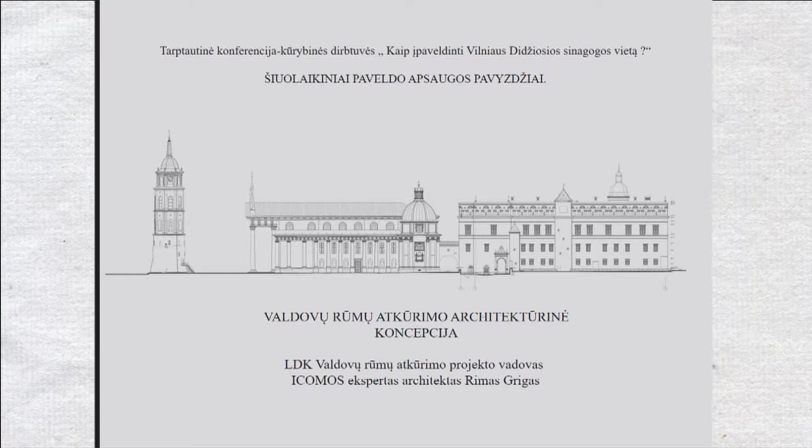Since 1994 I had the honor of leading the Palace of the Grand Dukes project, and since 2004 I've been given the responsibility and honor of preparing this project, which is so important for Lithuania.

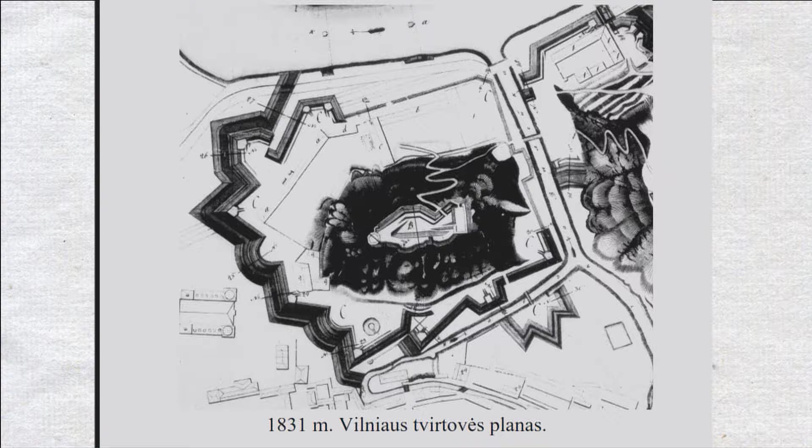Some history of reconstruction. In 1983, a reconstruction project was proposed in order to convert it into a national art gallery.

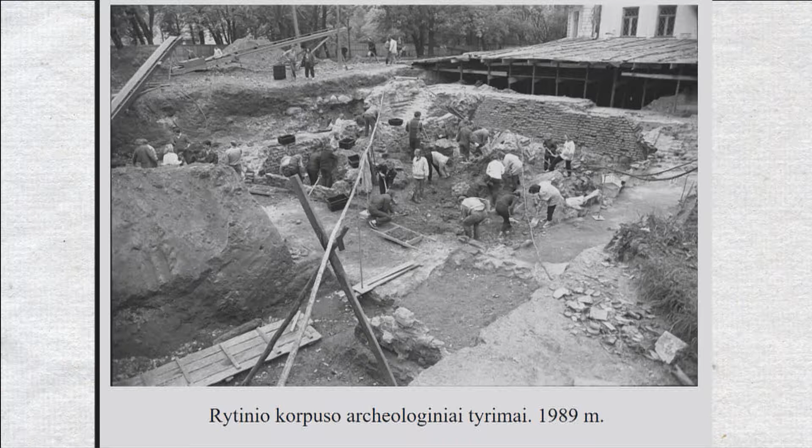In 1988, when the idea of reconstruction of the palace emerged, research was started in order to accumulate material for the reconstruction of the palace.

The remains of the underground parts of the building were excavated, and a very large educational effort was made. It was called Vilnius Pompeii, and it was very impressive to the community and residents of Vilnius.

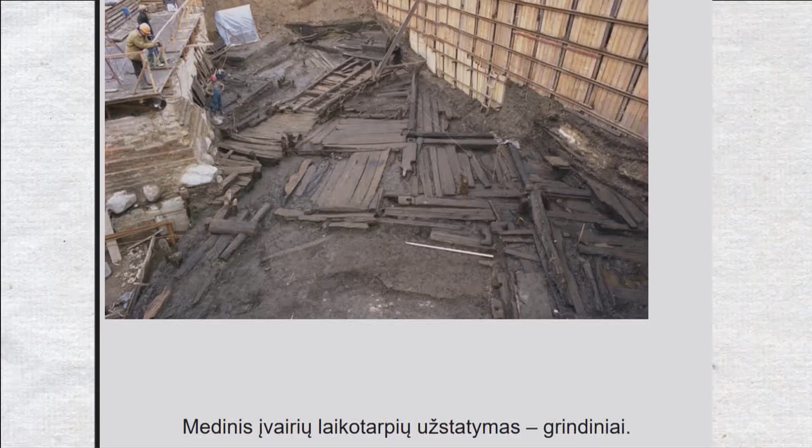It became a part of life in Vilnius, and then archaeological excavation became more intensive, continuing over the next 20 years, with more than 300,000 various artifacts accumulated.

The whole collection belongs to groups of architectural artifacts, ceramic and metal pieces. Then we created retrospectives of the construction of the whole palace.

Here, in red color, you can see the pre-Gothic remains of the castle that are outside the perimeter. The black color represents the Gothic remains, and the Renaissance part is shown in white.

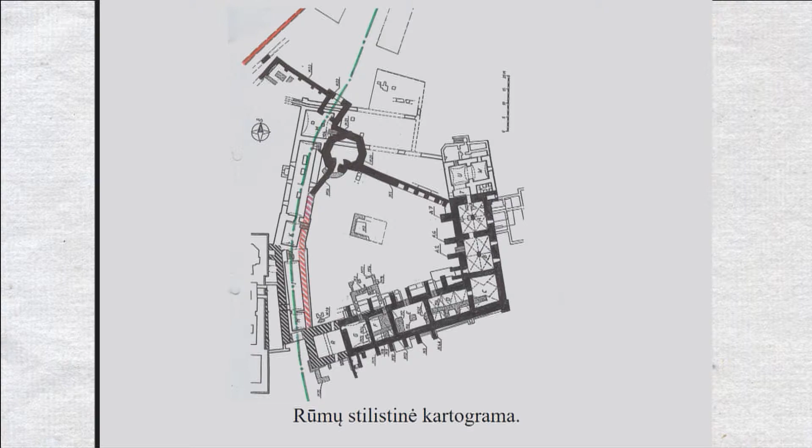We also collected historical data and made an inventory of all the finds excavated here, which helped us in the progress of the project.

Of course, there were difficulties in terms of the research made during the process, and even today we don't have all the artifacts fully inventoried and clearly understood.

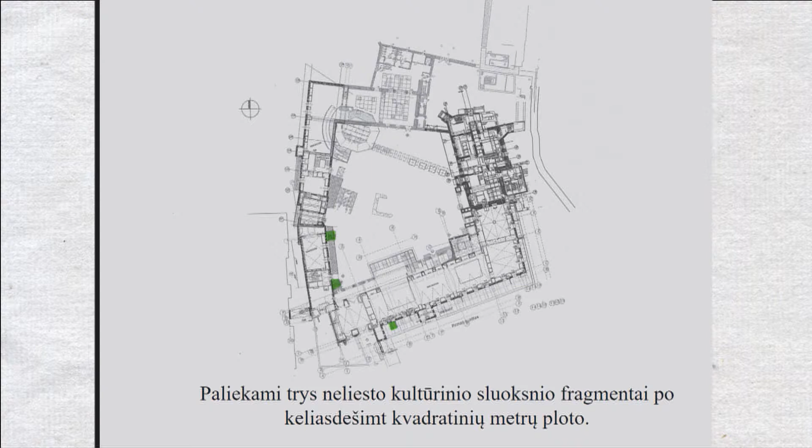Here you can see the scheme where some excavated artifacts were left in place for future generations. Not all of it was investigated and excavated.

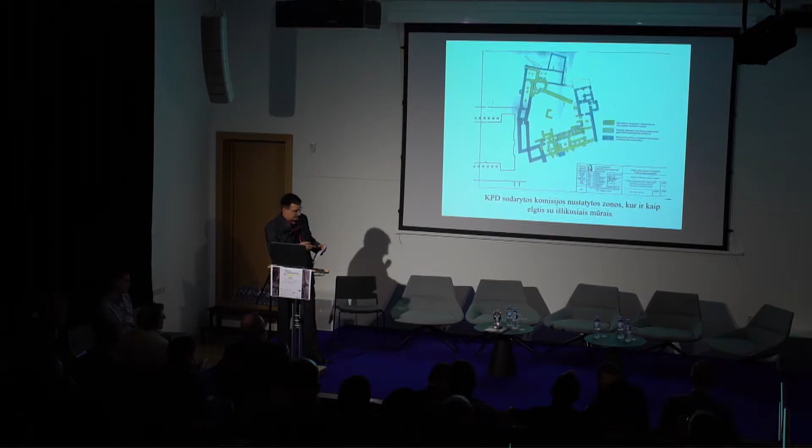I will come back to this and show this plan now. At that time, we also came to understand that we needed to make the exposition and display of these remains, covering them properly.

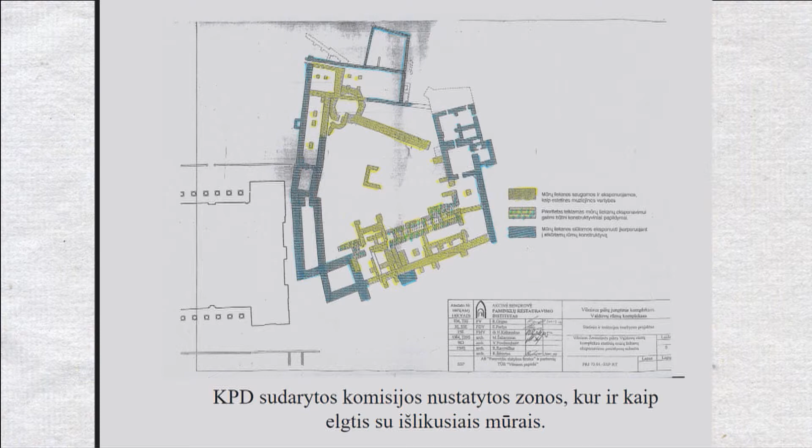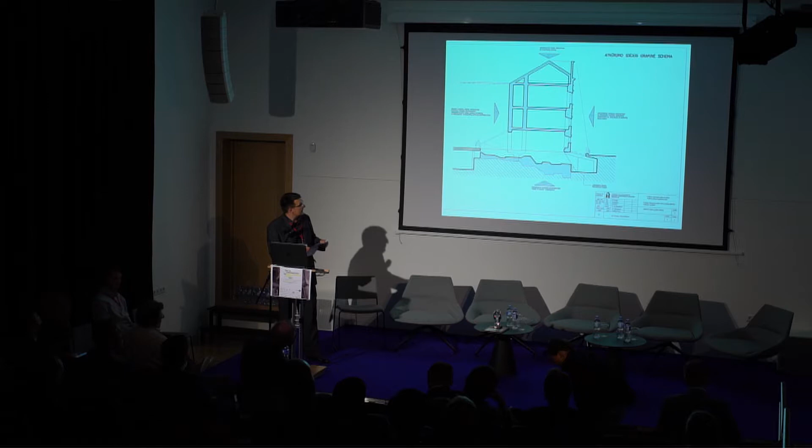We can see the zones here where we wanted to cover it for further display. My team presented the concept, and it won the tender, so we proceeded with the project.

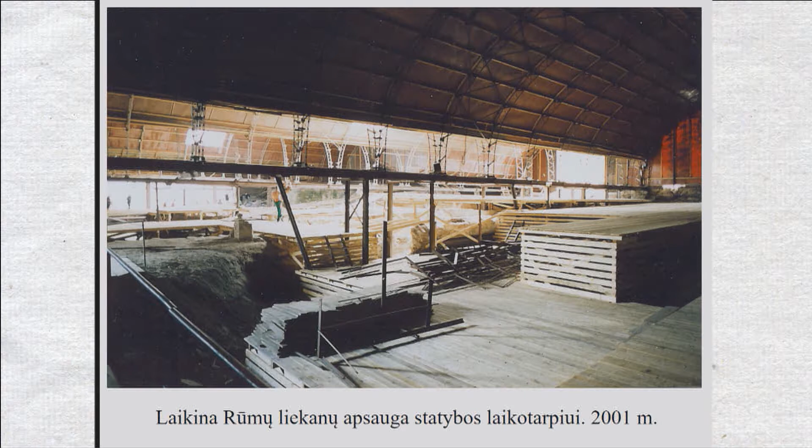At that time, in 2001, we started the removal of the hangars. The remains underground were protected by a certain cover in order to protect them from destruction.

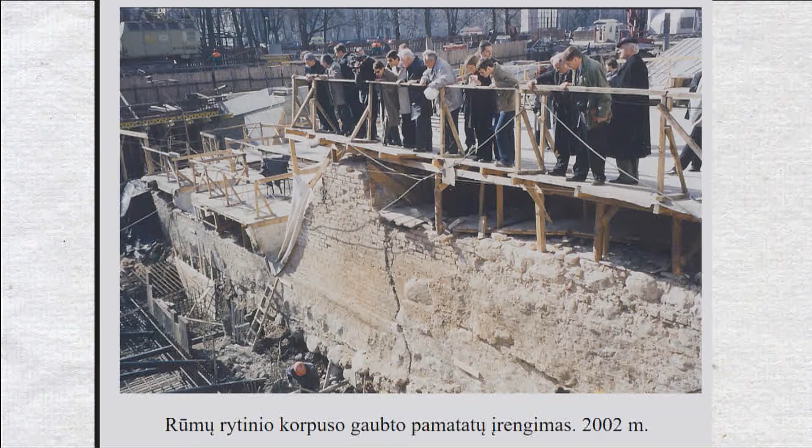You can see the cranes that started the removal of the hangars, and the eastern part was started to be reconstructed. An interesting fact: at the beginning of construction, people were coming here to see from special lookout points. And here you can see then-Prime Minister Algirdas Brazauskas, who was the curator of the construction, and he was great help for us in moral terms and provided great support.

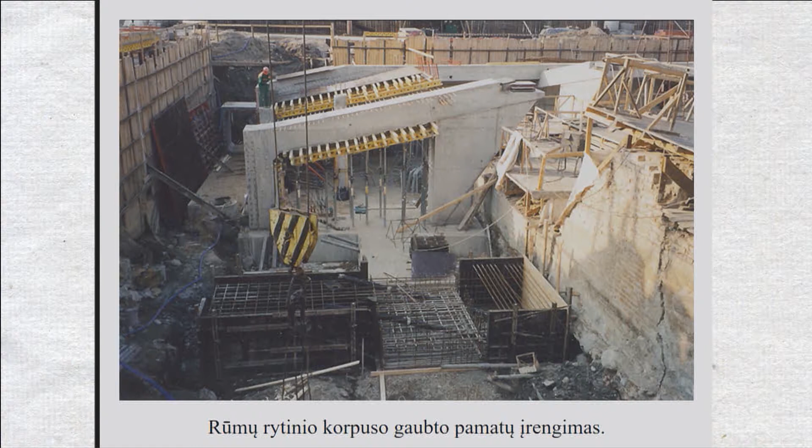This is how we started the reconstruction, the whole idea, and protected the remains of this palace. And this is an interesting plan, a blueprint of 1787, where we can see the reconstructed cathedral, the constructed cathedral, which was done by architect Stuoka-Gucevičius.

The opponents who were against the recreation of the palace said that these buildings never stood side by side, because when the palace was there, there was no classical cathedral, but when the classical cathedral came into being, the palace was destroyed. But when we found this plan, all these questions disappeared and were not an obstacle for further work.

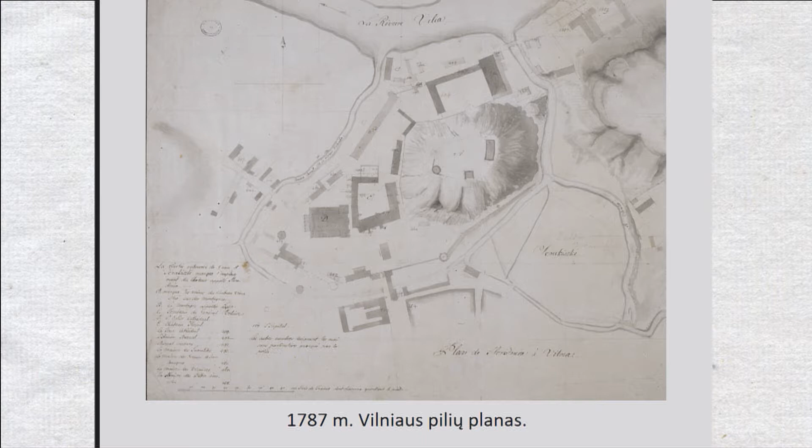On the basis of the main rules and concepts of heritage, and on the experience of neighboring countries in this respect, and in sight of the exclusivity of the object, we had 7 principles that we had to follow. The first one was the recreation of the palace as a lost chain in the whole complex of this territory.

By size, the palace is very similar to the reconstructed King's Palace in Warsaw, or the palace in Krakow. So basically, the question was why it's twice smaller in size than in Krakow and Warsaw.

Historians actually found out that a part of the buildings have not remained here, and when we look at St. Barbara's Church, we can see that all these buildings were in one system. You could go through the corridor from St. Barbara's Church to St. Casimir's Chapel. So we were not able to create these connections—maybe it's for future generations again.

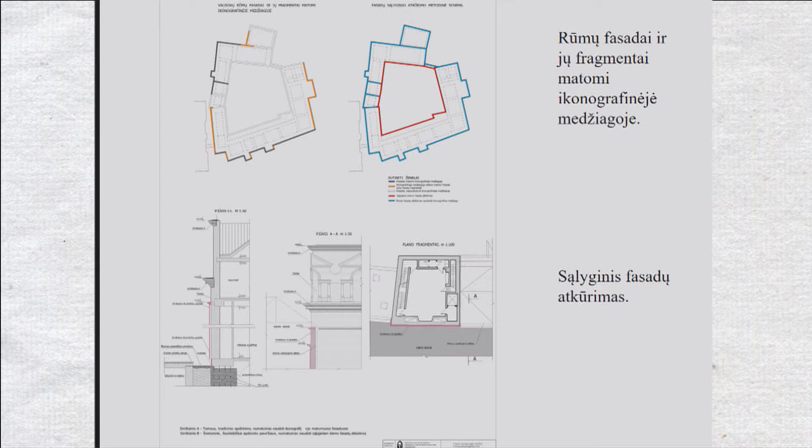Maybe you cannot see it clearly here. However, we wanted the inner courtyard facades made from stone, but if you look at them on a sunny day, you can see that the inside facades are more or less smooth, and you can clearly see which facades follow the iconographic material and which ones are interpreted.

Here we used another method, because we had really a lot of stone artifacts, and we made a number of tours around Europe to neighboring countries and took on their experience of the method to be applied. So you can see the fragment of it—all the parts made in stone are based on the stone artifacts, and this stone is taken here from Gotland island, from the original sources. We managed to do that in some curious way.

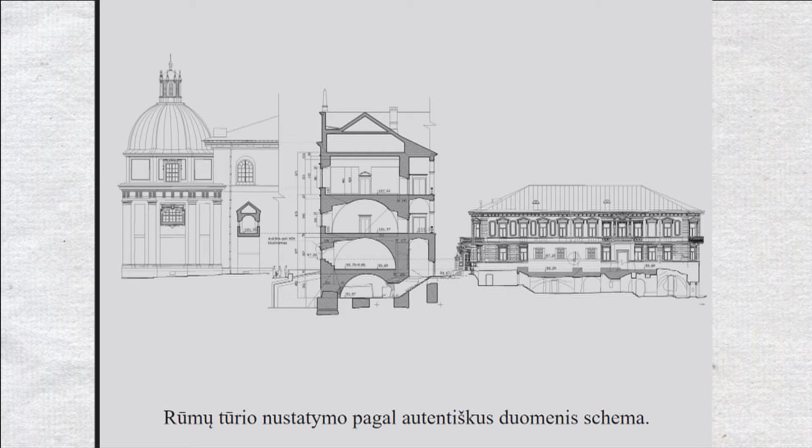The walls and the arches have their own diameter, and we put it together, and we have this type of structure. This is the constructive decision and solution—the idea is that when you go to the basement, you can really see the height of the facade.

Well, originally you can go here and see for yourself.

Actually, the only authentic part of the building is St. Kazimierz Chapel, because the Archcathedral was turned into classical style. The chapel was built here in 1610 as the main chapel for the king, which is why the architecture matched the king's palace. An interesting point is that the chapel was matched to the palace, then the palace vanished, and then the cathedral was reconstructed, and we built the palace again. That was an interesting point in history.

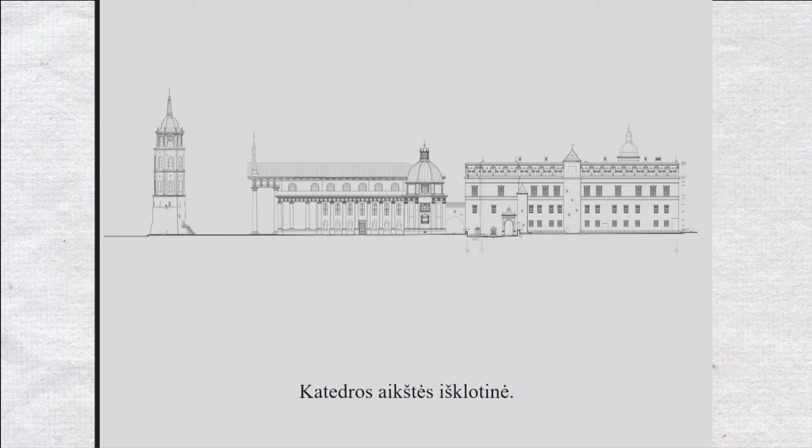Number 3: the recreation of the facade without iconographic material was based on other original remains and also the known iconographic material found in similar buildings elsewhere.

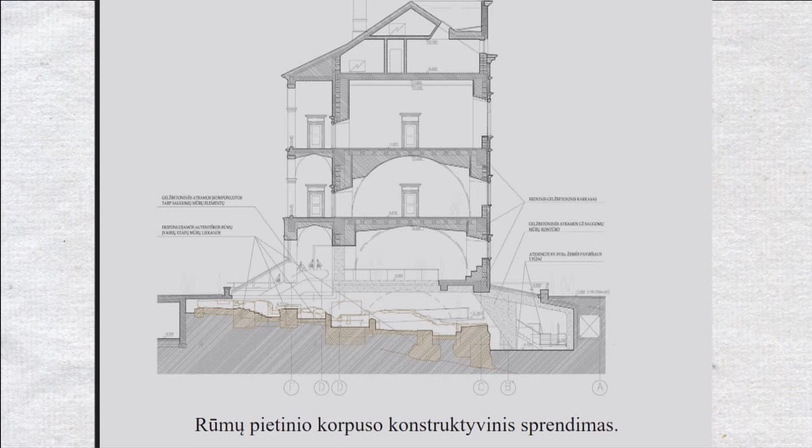With a little time left, I can tell you shortly, we can see that all the building nearly floats in the air, so we had to make very light construction solutions. Basically, some of the walls are empty, just for construction purposes, since we needed to save a lot of weight.

Now the recreation of the facilities inside was similar to the original facilities, and the halls of the palace on different floors. I can shortly say we were thinking a lot about that.

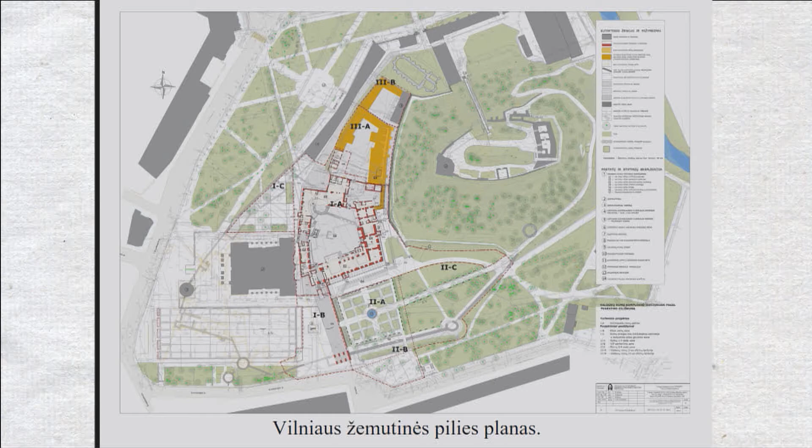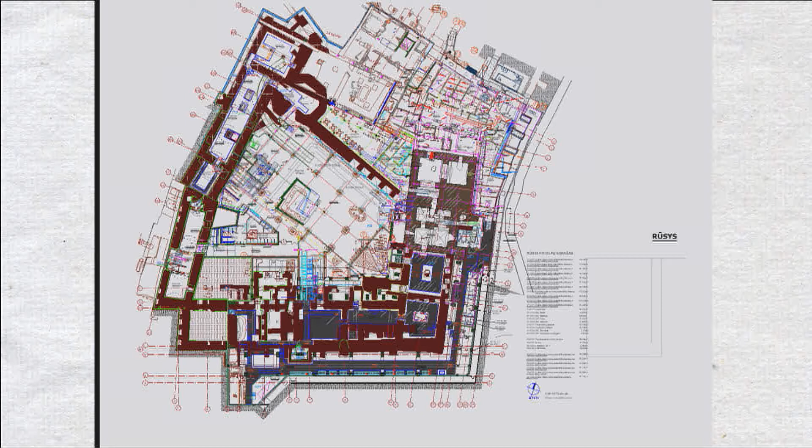We actually established the archaeological museum here, as we call it, where you can see under the glass covering the remaining uncovered lower parts of the walls and foundations. And all this part is like one big open space.

We can see on the plan that this is really like a big factory, with the cafeterias, the archaeological displays, and all kinds of engineering installations. So it's basically a very complex mechanism.

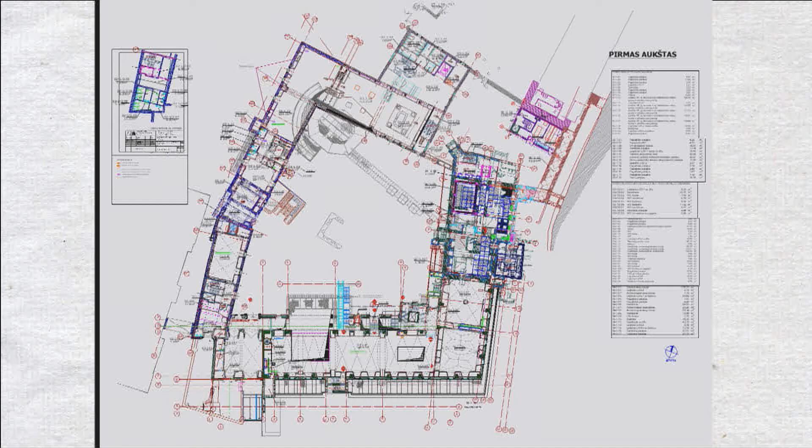We planned for about 5,000 visitors per day maximum, and on the ground floor we can also see the spaces dedicated for tourist purposes. The second and third floors are meant for the historic interiors that were reconstructed, and in the attic we have the administration.

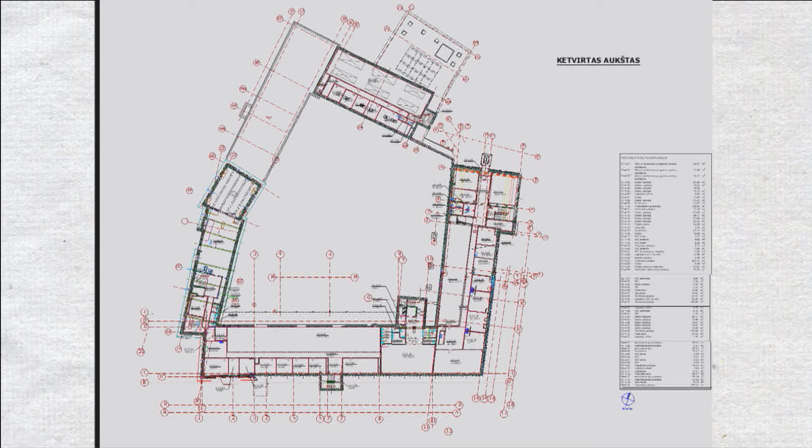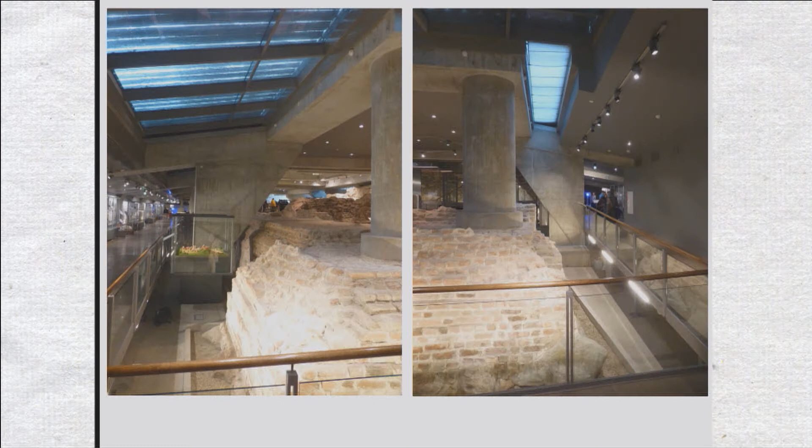There was also the reconstruction of the authentic material of the furnaces, and we can see how it was recreated, with the display of these remains done in an interesting way. We used the experience of neighboring countries, popular solutions that we exploited here in the displays of the authentic remains that were uncovered. We can see it all here in the basement, in the southern part of the complex.

On the ground level, you can also see this window above, and the windows that provide light for the displays on the ground floor, as well as the visual connections with the basement and the different parts of supports. We use glass where it is possible, and some of the arches had to be restored with new bricks.

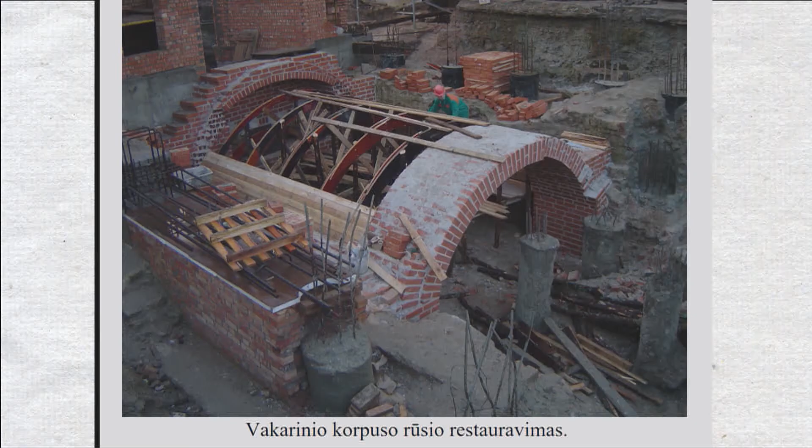Here you can clearly see how much authentic material remained and how thick the walls were, and basically how these arches were restored as well.

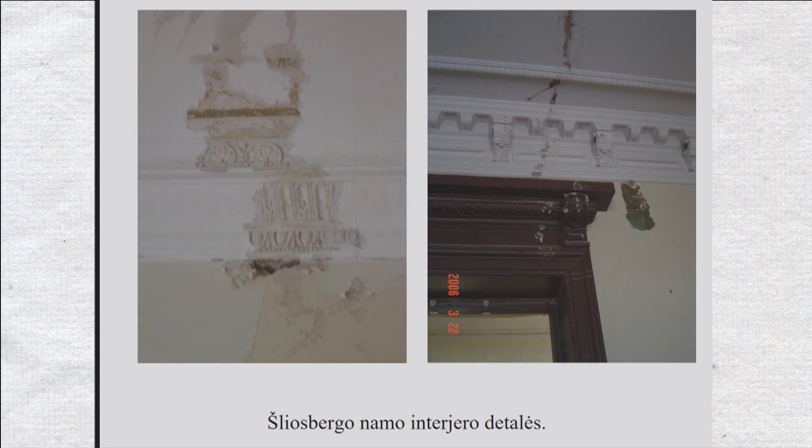There was a problem with the house of the Šliosbergs, which was built in classical style with its interior details, and the problem was how to incorporate it into the whole palace complex. Here you can see how it was done, and there was a huge discussion, so we managed to preserve certain authentic parts.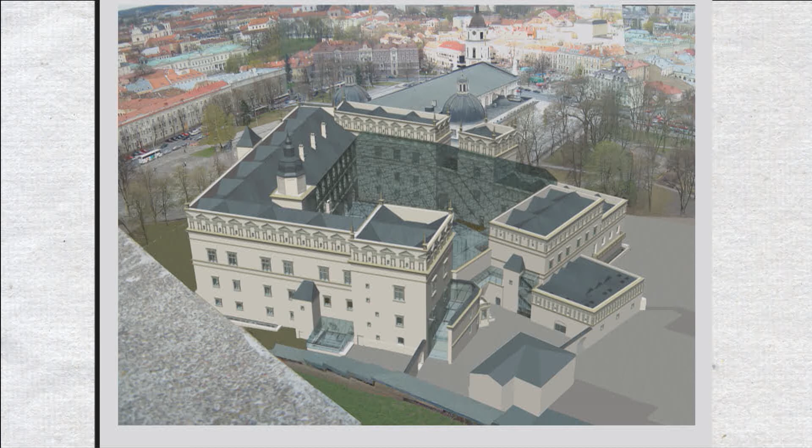The idea was also to cover the inside court with a glass roof, but it was too expensive to construct.

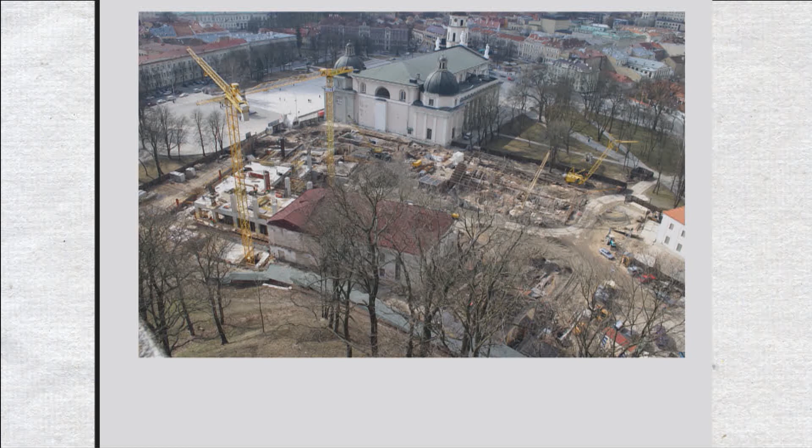Finally, just shortly, here are the historic pictures since 2001, showing how it progressed in the reconstruction. This is what it looks like from the square side.

Thank you again for inviting me. One final important point: in 2006, the president of ICOMOS, Michael Petzet, praised this reconstruction very much and congratulated us on the result, saying that these solutions actually represent the reconstruction idea.

We're really happy that this synagogue case has been started with this conference, and I wish you patience and resilience in all your work. Yesterday when I heard that Litvaks are so resilient, I thought that's because the Lithuanians are so resilient. I believe that in its due time, the synagogue will be in place. We are looking forward to it. Thank you.